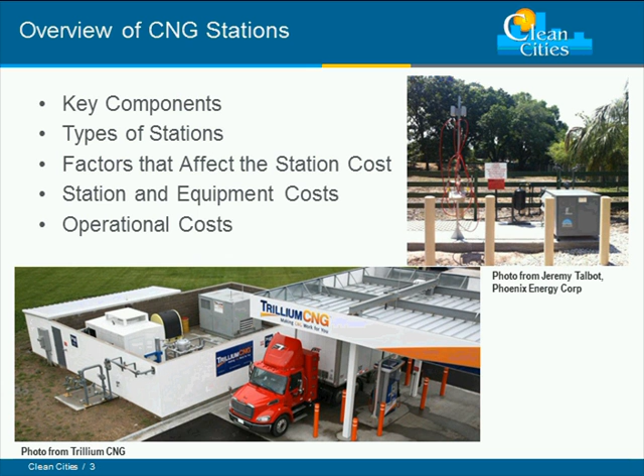Some of this, for some of you folks, might be some information you already know, and there may be something that's going to be new for some of you, so we appreciate your patience as we go through this.

This next slide really kind of just breaks down on a very simple basis the key components and costs of a CNG station, and by no means, again, is this every nut, bolt, and washer, but kind of the bigger parts of the station. Just as a quick run through, the first item on there is the compressor. So basically what we're doing is taking the natural gas that's supplied by the gas utility that comes in the pipeline to the site. We need to compress that.

As you might know, in order to get the energy out of the natural gas, it's a gaseous fuel, it has to be compressed. So that's what the compressor is doing, is compressing the gas so that it can then be dispensed into the vehicle at 3,600 psi or 3,000 psi in the case of those vehicles. As Dennis was saying, there's a big range on these prices, and that's certainly true of the compressors. We can be looking at anywhere from a small fuel maker type single refueling appliance for $5,000 up to $500,000 and higher, depending on how many compressors are needed for the station.

The next item is a dispenser, and the dispenser is what actually puts the fuel, the compressed natural gas, into your vehicle, and that very much looks like and operates the same as the gasoline dispenser that you probably encounter when you fill up your vehicle with gasoline. We're going to be talking about time fill stations here, and so we're going to be referring to the time fill post, and I'll give a better example of that when we get to some slides here in a few seconds.

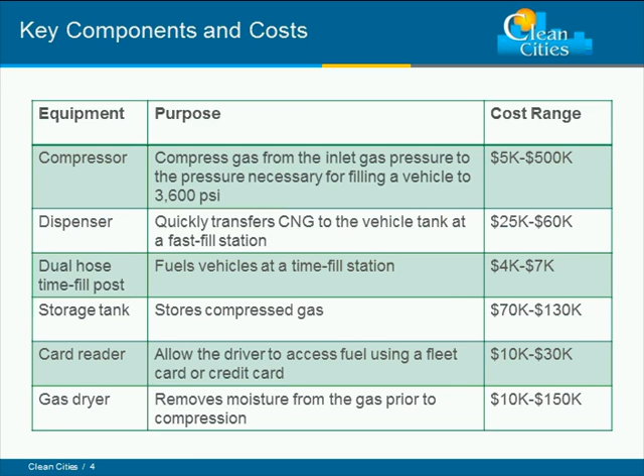So basically three types of station. A fast fill station, which is very similar again to what you would experience with a gasoline station and dispensing liquid fuels. A time fill station, sometimes it's referred to as slow fill. Like Dennis, I spent a lot of time on the natural gas side of the industry in my private sector days, and never like to use the term slow fill because it always seems to have a negative connotation, but certainly time fill lends itself perfectly to fleets that come back every night to a central location.

If they're going to be sitting for 10 or 12 hours, that's a perfect opportunity for them to fill up. And then we have what are known as combination fill stations. This may be a station where you'll have time fill as the primary fueling source, but a fast fill backup. We see this oftentimes with applications such as school buses, where they can use the time fill 90% of the time, but just in case they need to take kids to a game or on a field trip and need to put in additional fuel, they can have that fast fill option.

And then what you see there are a couple pictures. On the bottom left you can see is Washington, D.C. Department of Public Works. They've been running natural gas vehicles in their fleet here in D.C. for well over 15 years. And unfortunately, that white Honda Civic is something that if you live or work here in D.C. and you have your car parked, you don't want to see when you come out, because those are used by the D.C. parking enforcement folks, and they have been for many years. So we like to see those cars driving around and know that they're using natural gas, but you just don't want to see one parked in front of your car.

On the right-hand side is a picture of the town of Oyster Bay, New York, up in Long Island, where they're operating about 45 natural gas refuse trucks. And those posts with the hoses you see coming down are the time fill posts. So when the drivers return back to the yard at the end of their day, they can plug in the hoses and the vehicles can fill up while they sit there overnight, and they're ready to go the next morning.

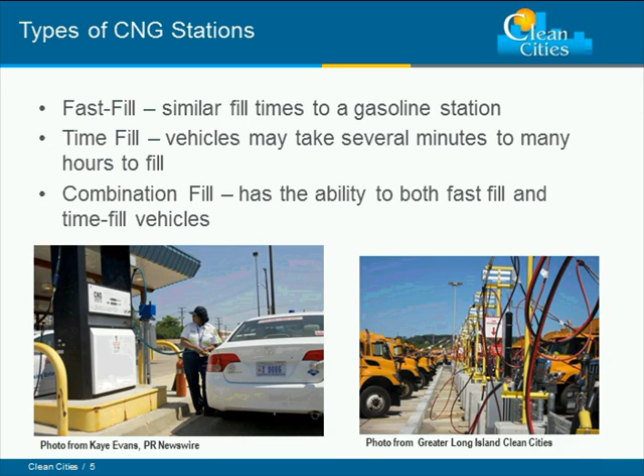So I showed you that slide a few seconds ago on the different components of these stations, and here's kind of what they look like in a real simple schematic. Reading from left to right, we've got that gas supply that comes into the location. Typically, we'll have an inlet gas dryer. Oftentimes there can be moisture in the gas, and in various parts of the country that moisture content is higher, so it's always beneficial to have a dryer there that can dry the gas and remove that moisture. From there, that third component from the left is the compressor, and again, that's what's compressing the gas up to 4,000 psi and higher. And then it goes into the storage.

That's the next schematic you see there, and you see low, medium, and high. So think about this. We've got this gas stored at high pressure, but now how do we get this high-pressure gas into the vehicle? We do it by basically equalizing the pressure that's in those storage containers to the storage vessel on board the vehicle. So you'll see there's typically 3 banks of storage, a low, medium, and high bank.

So as that pressure is equalizing, you have higher pressures kicking in from the storage, first starting off with a low pressure. As the gas quantity rises in the vehicle and the pressure comes up, then the medium bank kicks in, and then finally, as the vehicle fill nears completion, the high pressure bank will kick in. So again, we can get that full fill into the vehicle. And then finally to the right, where you see the drawings of the 2 vehicles, are natural gas dispensers, and as you can see, they look and mimic very much what you find at a gasoline station.

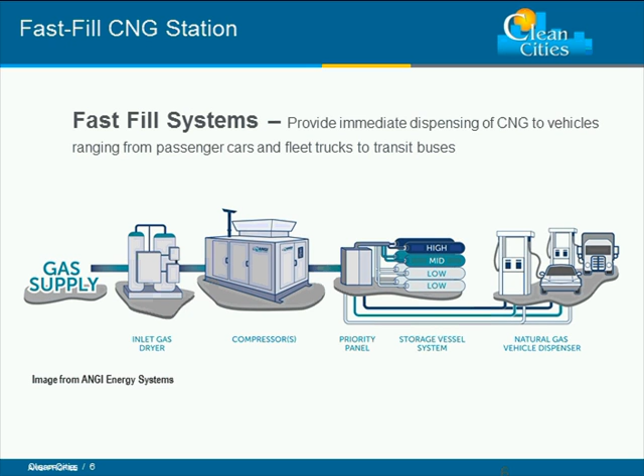The next one we're going to show, there we go, is a time fill system. Again, very similar to what we just saw, except the one missing component is the storage vessels for the gas once it's compressed. And that can be one of the advantages to a time fill station. If a fleet knows that time fill will work for them, oftentimes they can realize a little bit of cost savings by not having to incur the capital expenditure necessary for the storage vessels at the site.

So again, going from the left to the right, we've got the gas supply, coming into the dryer, we're compressing the gas, but this time we have a kind of a master time fill panel that, as those vehicles come in, will be able to tell who needs the most fuel, and it's kind of the path of least resistance. Then those vehicles will begin to fill up during the course of the evening and overnight while they're parked, so they're ready to roll out the next morning.

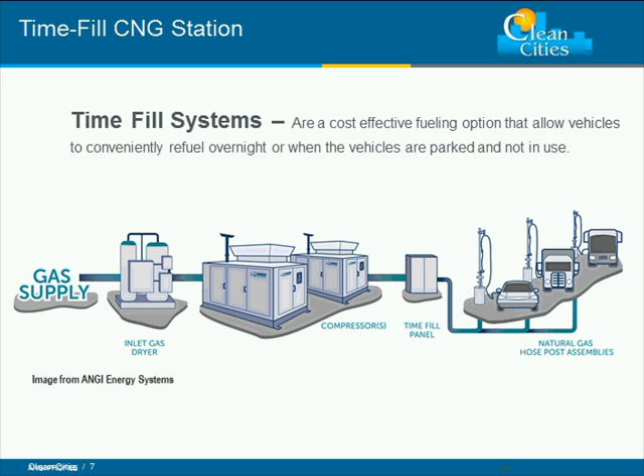And finally, this is the combination fill station we talked about, where again you're using the time fill as probably your primary fuel source, and you're having that fast fill dispensers as a backup system. And again, so here we have kind of a combination of components. We still have our time fill panel to help us with those vehicles that are filling overnight, and then we have our storage, our low, medium, and high bank storage to help with the fast fill. And again, those same components, the dryer and the compressor, obviously.

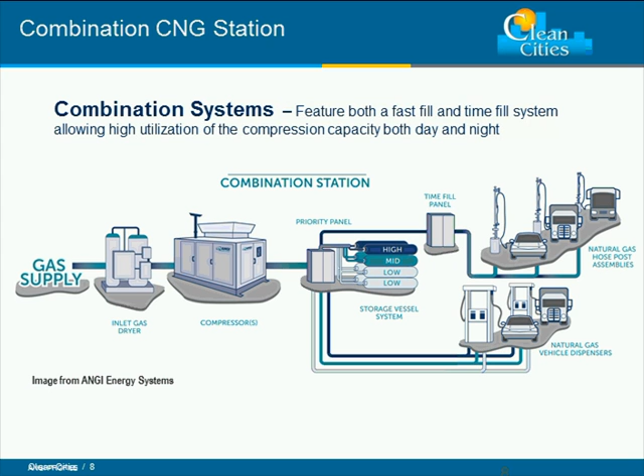And with that, let's move into kind of the types of stations. We hear about public stations and private stations and public-private stations and all that. What does all that mean? So public stations means exactly that, open to the public. So that means as a retail consumer, you could access those stations, or what we're seeing a lot of recently with the development of a lot of new CNG infrastructure is kind of a fleet public access as well, where a lot of stations are being sized not only to service the consumer, but also to service other fleets in the area. And so again, that experience would be not unlike any consumer or fleet driver would encounter during his experiences with filling with gasoline or diesel.

Private stations are exactly that. Typically, these are stations owned by transit agencies or gas utilities or refuse companies, and those stations are built specifically for their own use and do not allow public use. Although we have found in some cases where some private fleet stations, while they may not be open to having the retail consumer or the public come in for liability and insurance issues, oftentimes if they can work out an arrangement that works for both parties, they might allow another fleet to come in and fuel from their station.

And then finally, the third model we see there is the public-private station. And we see a lot of these models exist today. Refuse is a good example where, again, a Waste Management or someone might have their own station behind the fence that allows them to time fill their trucks overnight. But then on the outside of the fence of their property, they're able to put in a driveway with a card reader and a dispenser and allow the public or other fleets to come fill. And you see a couple pictures here. These are of Washington Gas, our gas utility here in the D.C. area that services Virginia and D.C. and Maryland, and this is from their facility in Springfield, Virginia. So that, again, is just kind of a quick overview of the types of stations and the different components involved.

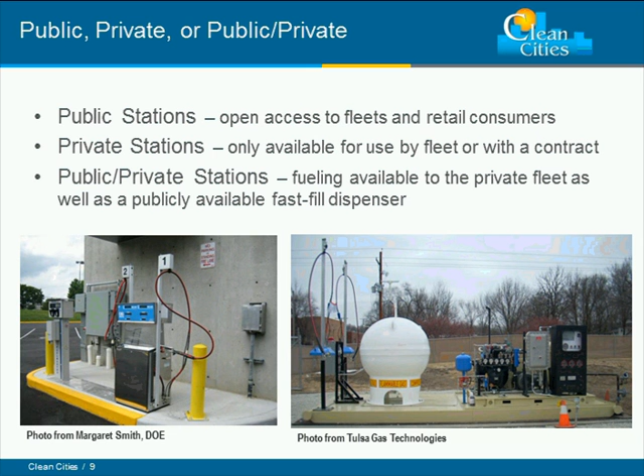With that, I'm going to turn it now over to John Gonzalez from NREL, and John will dive into more detail on the various factors that can affect station cost, as well as jumping into some examples. John? Mark, thank you for that introduction. I will be, as you said, going into the key factors and costs relating to natural gas stations. Now, one thing we just need to understand is, as Dennis mentioned earlier, there are a lot of variables here, but what we did is we pulled a lot of this data from Recovery Act stations and also from different industry providers that has given us some pretty good background on some of these costs. We'll go through that here in a little bit, but just want to let you know there's multiple things that can affect the station costs.

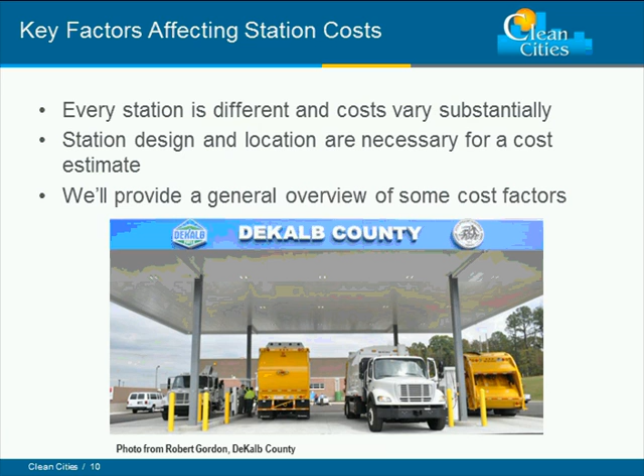And so we start out with really every station is different and its cost can be different. The design and the footprint will change that. The location, as we know, we always hear location, location, location. That can really change the cost of a site. And also what we're going to do is just kind of give some overall factors, and really what goes into a station and the costs that go into building these stations really derive from the fleet or the customer's needs. And that's really where it leads into that, deriving into the customer's needs.

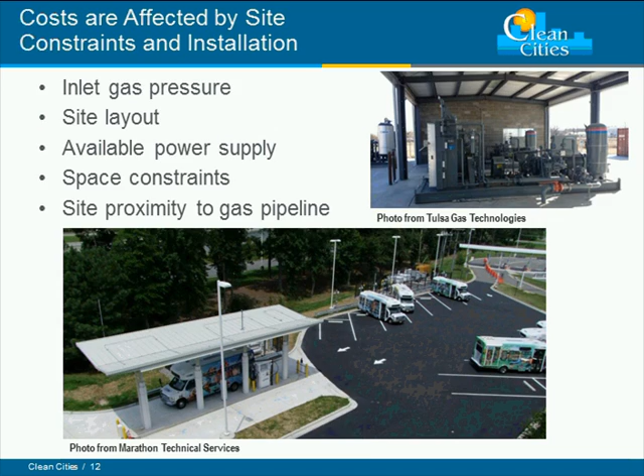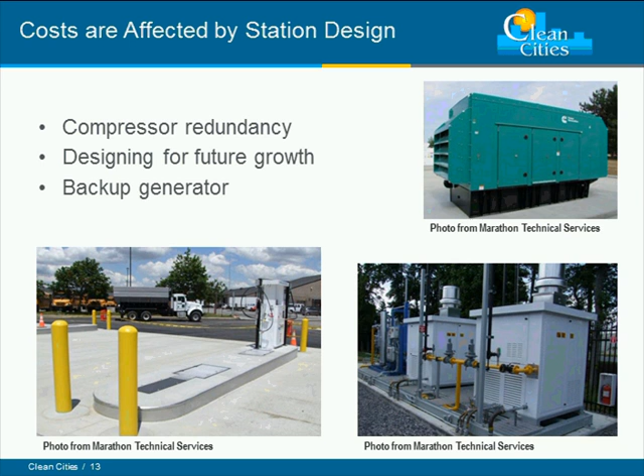Key here on this next slide is always get the AHJ involved, the authority having jurisdiction. In most cases, the fire marshal, but we want to get those folks involved early and often because they are going to be a key component to making sure that your site and the preparation for the site will be as efficient as you possibly can moving forward. So we definitely want to have those folks involved early on.

Keep in mind the operational cost. The operational costs include the fuel costs, your electricity, your maintenance. There are quite a few things that go into that you want to be aware of. What did it cost to bring the gas over there? Does it need to have a gas meter? Do you have electric demand charges? And those are all factored in to your overall operational costs.

So just put those in when you're factoring those, and lest we forget the liability insurance piece of the station, where that is where some of the challenges between public and private partnerships can work, but we have seen in many cases where that's a hurdle that can be overcome.

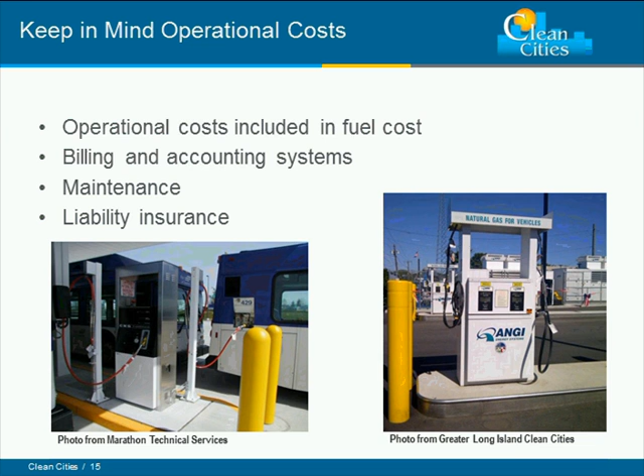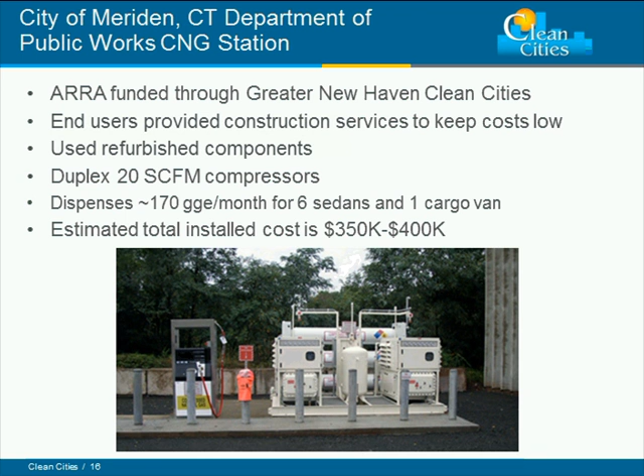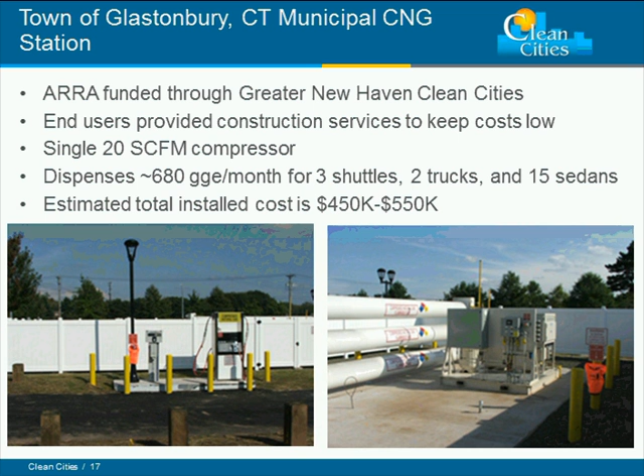So in different cases, you have the ability to look at new versus used, but then you can also see in this picture here that it does have the room for expansion. So if they do want to put a redundant compressor in at a later date, they can, and that's what that pad on the far right bottom there is, and you can see that opening there. That is so you can add an additional compressor at a later date.

It has all this as a backup, so don't feel like you have to be rushed to write it down right now, because there's a lot of information I'm going to go over here moving forward, but it's all included in those documents. Once again, we call it a ballpark. It's really a good estimate, but based on a lot of different data that we pulled in, and these costs include the engineering, the equipment, and the installation. Now, we understand that every site is different and every site can have its own challenges, so remember that there can be some differences that will change these costs, but these are a good place to start from.

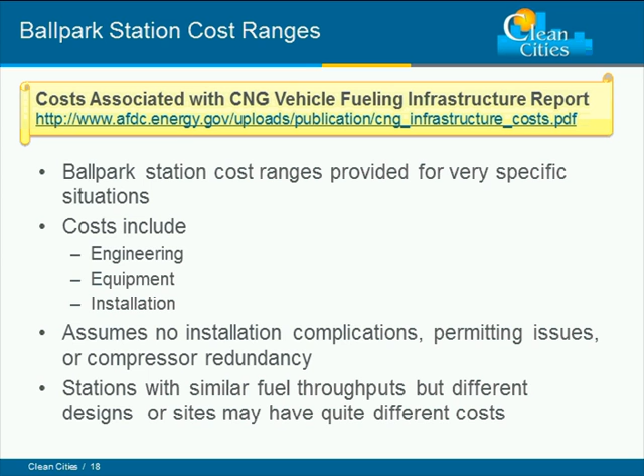This is kind of the basic time fill when Mark was talking about a fuel maker, a very small compressor, where you have basically 1 standard cubic foot of gas per minute that this compressor can compress, which is about a half a gallon per hour. This is the old fill that we're remembering and used to. That's in about the $5,500 to $6,500 ballpark.

And then we talk about a small fuel maker, what Jeremy I think will talk about here, an FMQ. That is more in the $9,000 to $10,000 ballpark. It's about 1 gallon per hour. So that's very small, more like for a single type of vehicle.

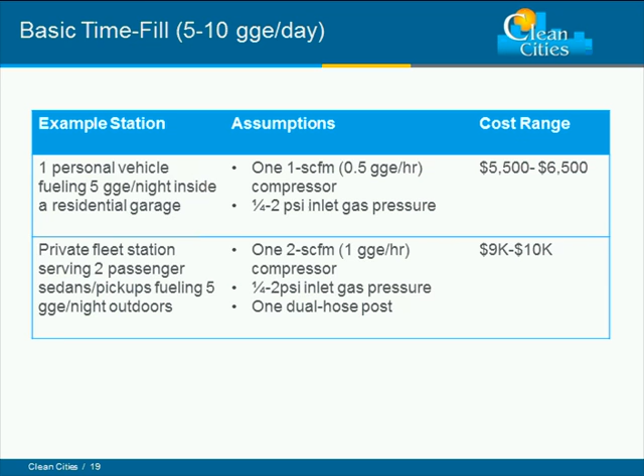Then we get a little bit bigger, still pretty small when it's all said and done, in that 45 to 75 range. I don't need to read through all these because there is a lot to it. But what it does is it shows you a little bit kind of that range. Not a very large compressor. This is really based on a fuel maker, what they call a quad, 5 pounds inlet gas pressure, and you do have a little bit of storage, not much, and a single dispenser. When we say a single dispenser here, it's really a hose drop like we're used to seeing on a time fill hose.

And then we can get another type of time fill here without having storage. That's the next example here. So you can see kind of the reduction in storage. There's a little bit of a reduction in cost there.

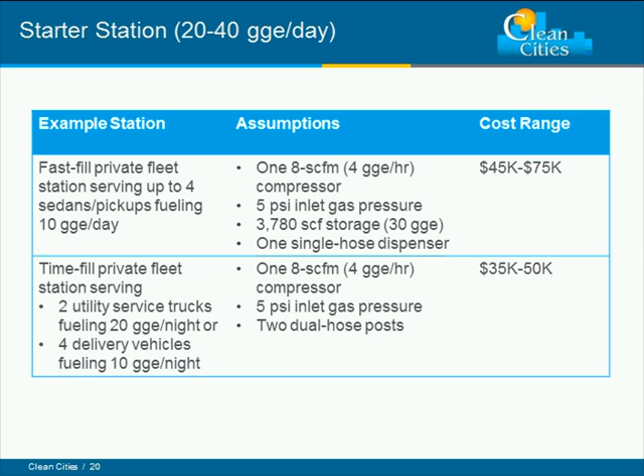We get a little bit larger here. This is where Dennis started saying that you can go from 5,000 to 5 million, and you can go all points in between. This here is kind of based on a fast fill station, and you can see these are basically almost the same. You do have more compression, and you have storage in the fast fill application where you really have very little storage in the time fill application, and you can see those costs, how they can be there and how

they can vary some. And really the thing you see different is you remove storage and you also have a smaller compressor, which is some of what we'll call iron costs, or the metal, the compression and the storage equipment that will change that cost some. Once again, this is all in the station cost infrastructure document that was released just a few weeks ago.

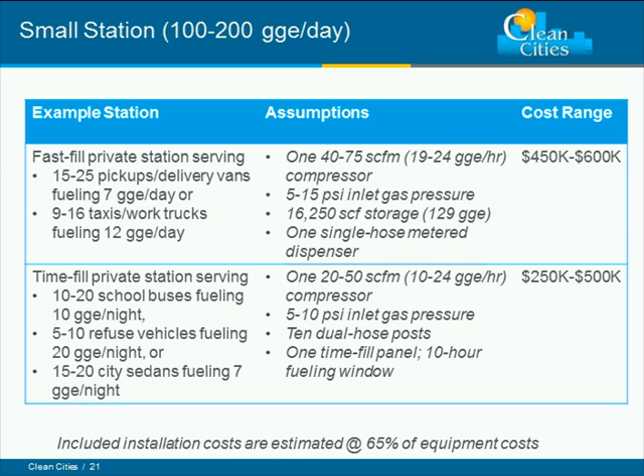We're getting into a larger station here. This is getting more like what you would see at a retail application for pickup trucks, vans, cars. We're not really talking too big as far as Class 8. That's not really this application here. But you can see below more what you would be seeing in a common school bus fleet, a smaller refuse fleet that is starting to look at stations and how they would be able to fill their vehicles overnight.

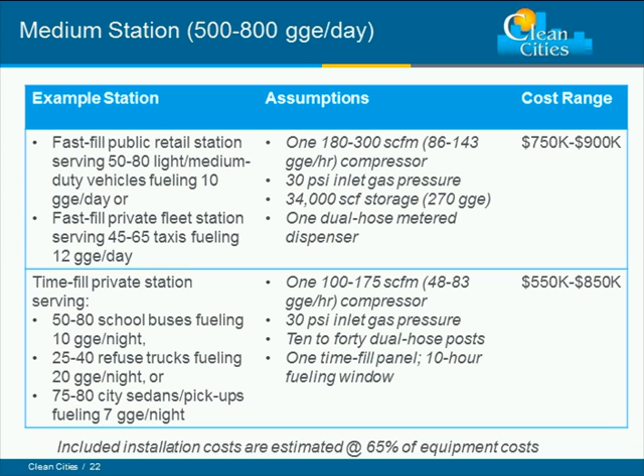And they still range, but you can see that they definitely have a different amount of fuel that they can deliver on a gallon per hour basis. Once again, these things can change depending on need, but these are some good costs to kind of start from.

And the one thing we also need to understand is as we get larger in compression, we go back to that gas inlet pressure and that gas volume, and it becomes even more critical to make sure that you work with your local utilities to establish that on the front end to make sure you have enough to supply on the back end for the vehicles themselves.

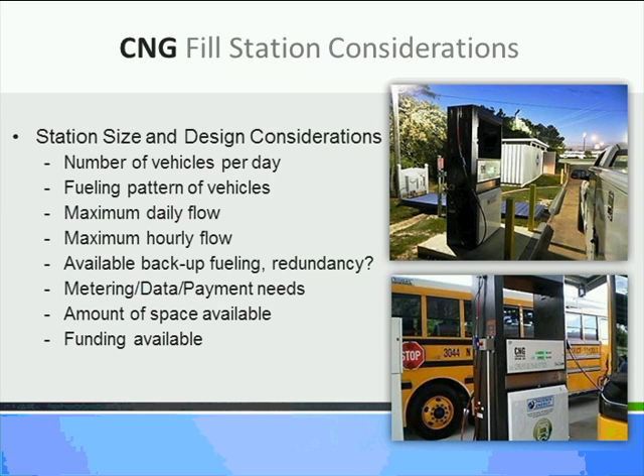Amount of space also, now that's going to be in relation to the actual station. How much space do you have to work with? Do you have a large plot of land or do you have a small parking lot? And then, of course, funding available. Whether you're a private consumer or all the way up to a government municipality, there's all sorts of funding available. And one of the great benefits of the Clean Cities Coalition is they have resources to access that funding and get everybody rolling.

So again, with the station considerations, land purchase, who owns the land? Is there utility service that's adequate enough to run the equipment there? Do you have single-phase power or three-phase power? Now, things like that would be determined up front

depending on the needs. It's not uncommon for a customer to say, this is what we want to accomplish, these are the amount of vehicles we have, and this is the driving habits of them. Here's the locations that we have. And as mentioned before, location, location, location. The location can definitely make or break the cost. So some locations are more suitable than others.

Site development, permitting, construction cost. Again, this is where your company comes in, whether it's us or ANGI or any other company that's out there. You need to heavily consider your company and their experience level because not all stations are the same. There is no one-size-fits-all once you start getting up into a certain range of vehicles who need to use up a lot of fuel in one day. The fueling equipment, compression, dryers, storage, dispensers, fuel metering, and data capturing.

Again, that's going to come whenever you're dealing with your sales rep at your company that you're purchasing your equipment from. As far as sizing your station, they should be able to recommend all of those components because they are, again, key components into sizing your station.

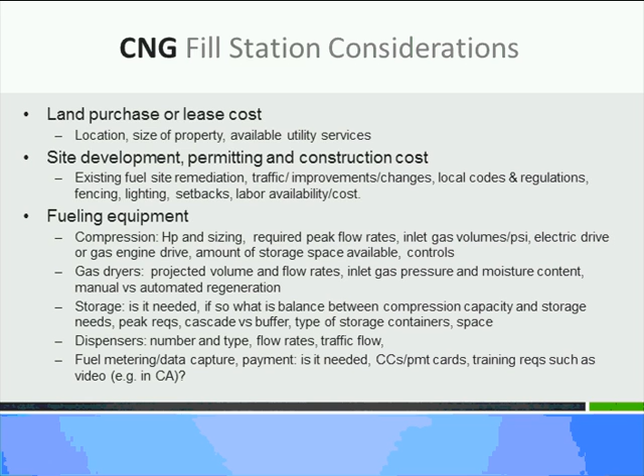The Phill does about half a gallon an hour, meaning if you pull your vehicle up to your house and you plug it in and you press start, it's going to refuel at the rate of half a gallon an hour. I've got my notes backwards. So if you're refueling a vehicle that has 5 gallons on board, then it's going to take up to 10 hours to refuel that vehicle. Now that's the slowest compressor that's out there, but it's also the cheapest and most affordable, and it's very economical for people who have vehicles with small tanks like Honda Civics.

Then we get up into a home refueling unit that's around the $9,000 range, which is going to be an FMQ2. Now that is a 1 gallon an hour, so if you have a 5-gallon tank on board your vehicle, it will take 5 hours to refuel your vehicle. Those compressors in particular are very ideal for refueling at home at night while you're doing nothing with your vehicle. You literally pull up at your house, plug it in, and push start and walk away, and they will automatically shut off once the vehicle is full. Now again, those are slow fill units.

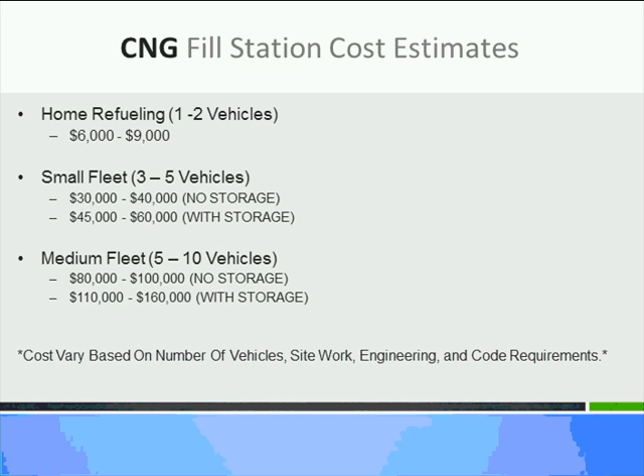Fuel maker, touching on the fuel maker product line. Now, again, this is one of the most common units that has been around for the home consumer market. It can be installed indoors, and of course it's with the U.S. standard, which is 3,600 PSI, and it is known as a slow fill unit.

There's some photos later on in the slide that will show some installations where it's installed in a garage. It's very small, it hangs on a wall, it's very lightweight, and it's very quiet as well. Now again, this unit produces half a gallon an hour, and most importantly, it'll automatically stop when the vehicle is full, so you don't have to be present the entire time.

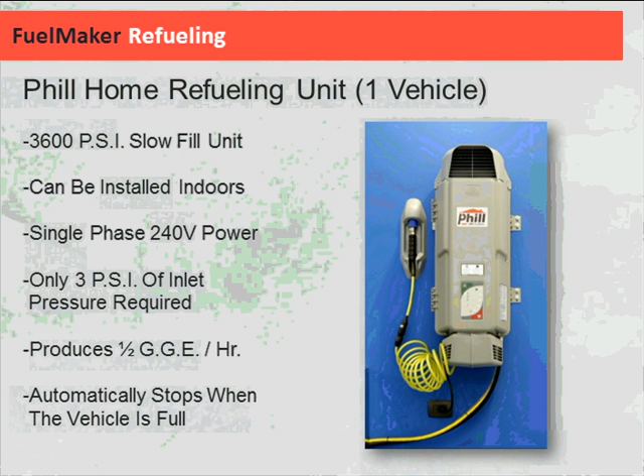Last but not least in the FuelMaker product line is going to be the FMQ8, which is basically 4 FMQ2s, which is the unit I just showed you previously. One thing that I've left out that's very important to know is all of these units run on single-phase power. So single-phase power, for those of you that are wondering, is available at pretty much everybody's house in the U.S. If you have 3-phase power at your house, you have one impressive house. It's only a small amount of inlet pressure required to operate the refueling units. And if you have natural gas available to your house, you can install these units at your house.

Now, jumping back forward, the FMQ8 is more ideal for small businesses, small fleets. You know, it breaks out of the appliance rating category, so it's going to be more of a small commercial application. And it also requires more inlet pressure than what's available at most houses. However, this one produces 4 gallons an hour, so with a slow fill on this, you can refuel at a much faster rate than the FMQ2 or the Phill unit.

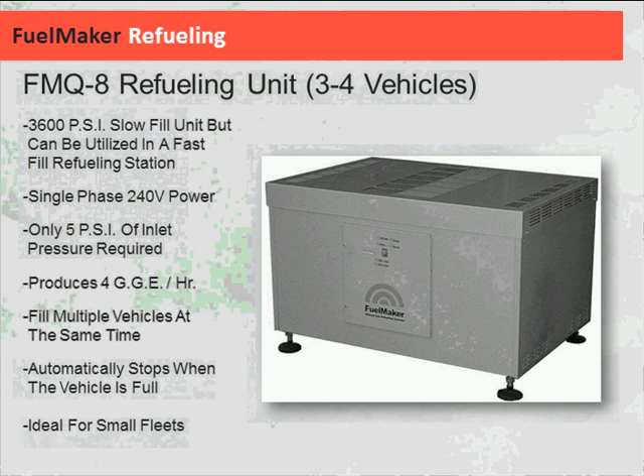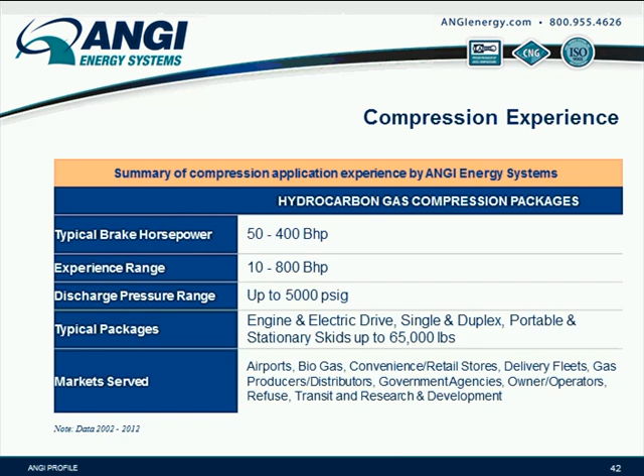What I've been asked to do today is a case study of a school district in Pennsylvania. This was a project that took a little while to do, but this was a school district that has 74 buses in their fleet. It's in the Philadelphia area. Their fleet is increasing in age, or was.

They had about 35 buses that were going to be replaced, so they made a decision that instead of buying diesel buses, they'd move into CNG buses. And they have a phased-in replacement program: year 1, 14, year 2, 11, and year 3, 10 buses. I think we're already at the year 1 and year 2 buses. They've taken advantage of some of the grants in Pennsylvania to help offset the incremental cost of alternate fuel vehicles.

Their base load for the initial phase is about 390 gallons a day, but the station has to have the capability to get up to around 585 diesel gallons when all their buses are complete. As I said, the school district got grants from Pennsylvania, and they're also doing some conversions of existing diesel engines. The Eastern Pennsylvania Alliance for Clean Transportation, which I know is a mouthful, I still like to call them Philly Clean Cities, were a big help in the school district getting the grants for the vehicles.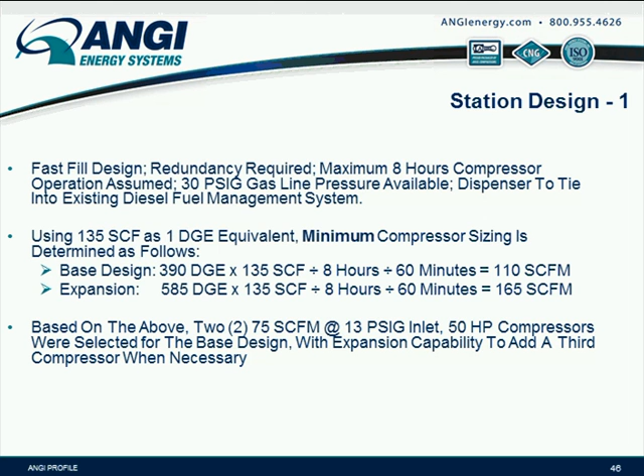The major components, as you've seen earlier in the presentation: we have an inlet gas dryer. We did size the dryer for the final flow, so for 3 compressors. We have the 2 compressors with the motor starter assembly, and the motor starter also included power distribution for the rest of the station. We have the half-inch construction, which is the smaller fleet size priority panel, which decides where the gas goes from the compressors, either to the vehicles or to the high bank, mid bank or low bank.

A standard 3-pack assembly, 35,000 standard cubic feet. That's about 240 gallons equivalent, and you get about 1/3 out of that, so typically 80 gallons plus is usable out of the storage, and of course, the dual hose dispenser.

There were also a few other criteria that we had to include. The compact footprint, obviously nobody wants to lose a lot of space. They wanted minimum noise impact, so we had to make sure that we took into account the noise from the compressors. They wanted the station to be easy to maintain. The tough one is aesthetically pleasing. I'm not sure how that goes in a school district's maintenance facility, but we had to make it look pretty. And again, we had to use the existing fuel management system.

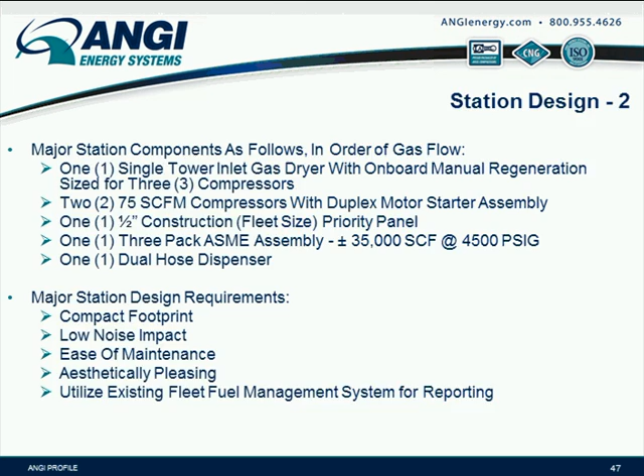This project also had a couple of quirks. The main one being there was an ongoing contentious relationship between the school district and certain local residents. I never really found out what the problem was, but it did cause some headaches trying to get the station approved. And I have to say, none of the comments from these people had anything to do with worries about CNG being dangerous or being installed in the school district; there was some bad blood there from something a

long time ago. The other thing was that the work had to begin on the day school finished, and we had to be up and running and pumping gas by the beginning of the school year. And then the final one, because grant funds were involved and a school district, we had to use prevailing wages, which to me always tends to complicate some of the administration and does increase the cost.

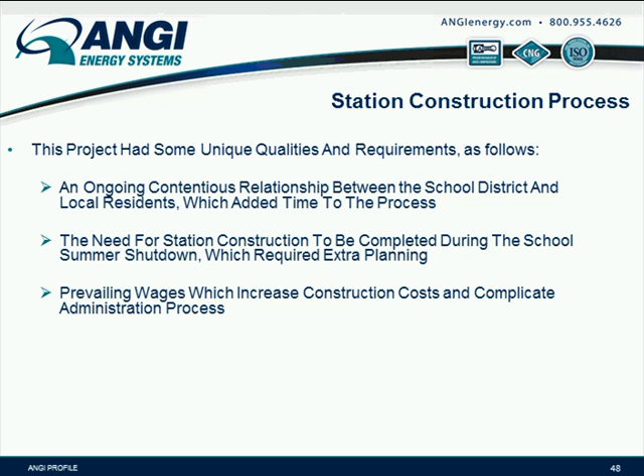The project timeline: in May 2013, the RFP was issued, and in July, a team of Air and Gas Technologies and Oxford Engineering was selected to do the design build. And in August 2013, the initial drawings were produced. Those drawings were needed for some of the outreach that went on. Between August and November, we went to 2 public meetings, gave PowerPoint presentations, showed school buses from other school districts, and basically gave information to the residents.

And also in that time frame, we actually had to attend 3 planning board meetings. Basically, the reason we had to go to 3 was because the residents turned up at every one of them and created commotions. Again, nobody really objected to CNG. They just had something in the background. But finally, in November, we got the approval and the permits.

So the equipment was ordered and the construction drawings were begun. And then at the end of the school year in June this year, the first shovel was put in the ground, and the station was up and running and pumping gas for the start of the school year. And the approximate cost for this project was around $800,000.

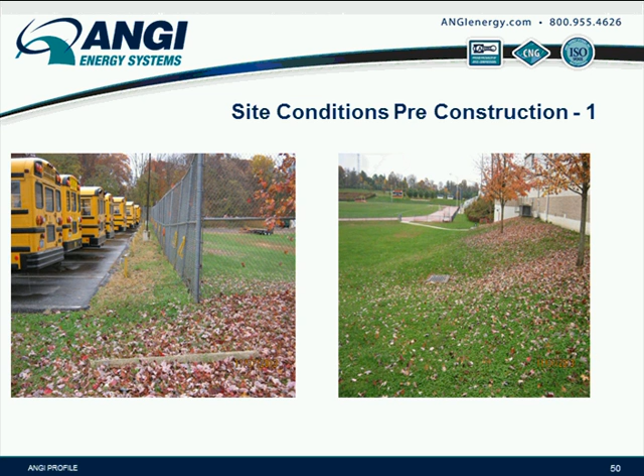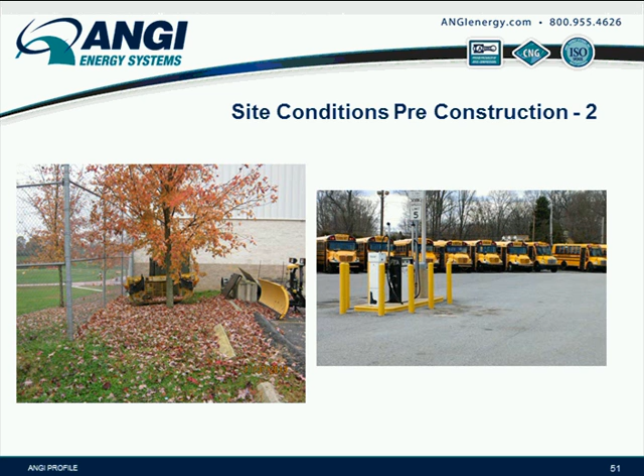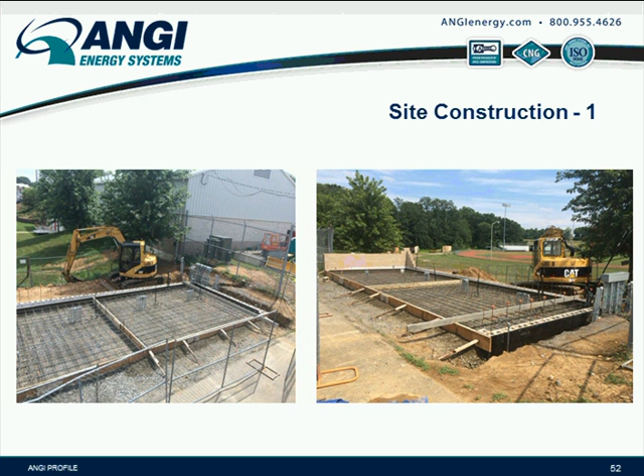In the photograph on the right, you can see as part of the sound attenuation and also the cosmetics, we are building a 3-sided enclosure. This is a masonry construction. We're having a wall on that side, along the back, and on this side. We leave the front here open for maintenance access.

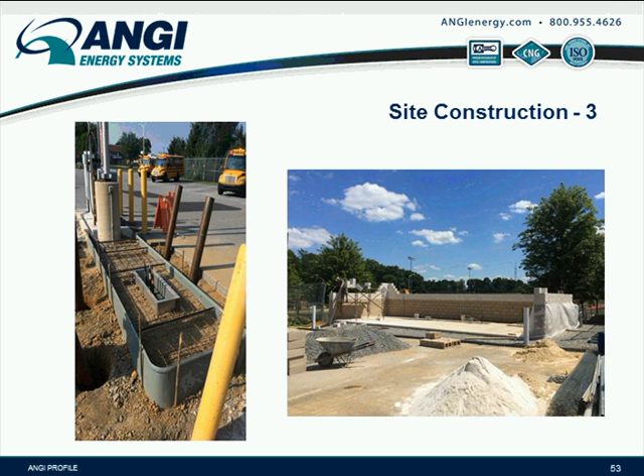See here on the left, the fueling island. We just extended the existing fuel island, but again, all the conduit and all the tubing is put underground first before the forms go in, so there's very little above ground that can be cosmetically bad and also a tripping hazard. And here on the right, you can see as we started to put the building together, I think the two-tone there is what we considered cosmetically pleasing.

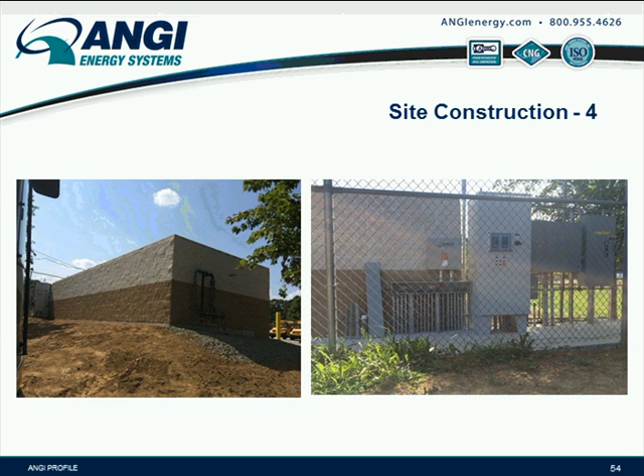And for anyone building a station, you really need to find an electrician that has a level, because this looks really nice here and you can have a perfectly working station, but if the conduit looks like spaghetti, people aren't going to be too happy with you.

On the right, we have an internal view from the compound, and as you can see, the conduit and the gas pipe is above grade, so again, we don't have a tripping hazard down here. You can walk through here to perform maintenance. All of the conduits come together and we have a trough, so again, keeps everything neat and tidy.

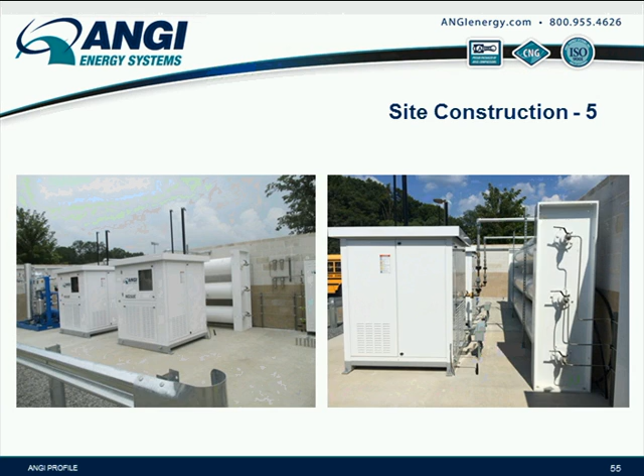Another couple of views here. On this one on the left, you get a better view of the priority panel, and you can see on the outside we've got guardrail as well as bollards. It's just a more detailed view.